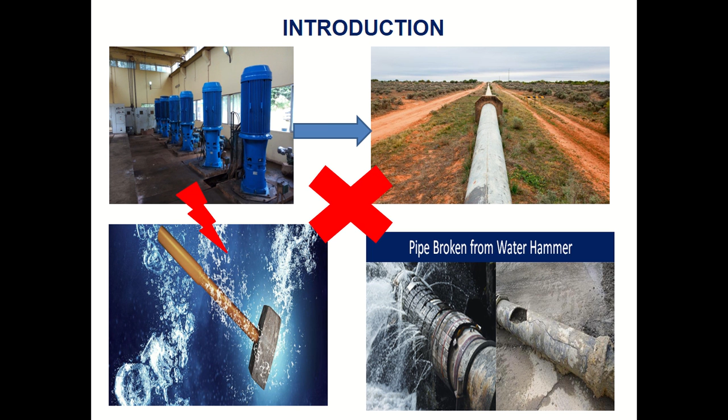CFD codes such as ANSYS Fluent and COMSOL Multiphysics present comprehensive modeling capabilities that can model different types of flow, ranging from simple geometries to complex geometries.

Background of the study. The case study, which is Ajalli water supply scheme, experiences power failure resulting in sudden shutdown of pump, introducing pressure transient that is linked to water hammer. For us to understand this water hammer very well, we also have to define water hammer in a different way, as a surge or pressure wave that is created due to sudden change in flow velocity in a confined system. The name water hammer originates from the hammering sound that sometimes accompanies this phenomenon.

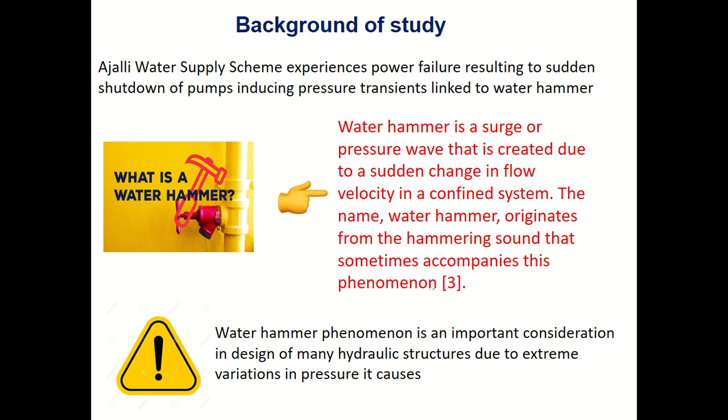It is important to note that this water hammer phenomenon is a very important consideration during design of many hydraulic structures due to extreme variations in pressure it causes. We also have to know that to analyze this water hammer phenomenon, a mathematical method is employed. This mathematical method analyzes water hammer by solving velocity and pressure equations for a well-defined elevation profile of the system, given certain initial and boundary conditions of the system.

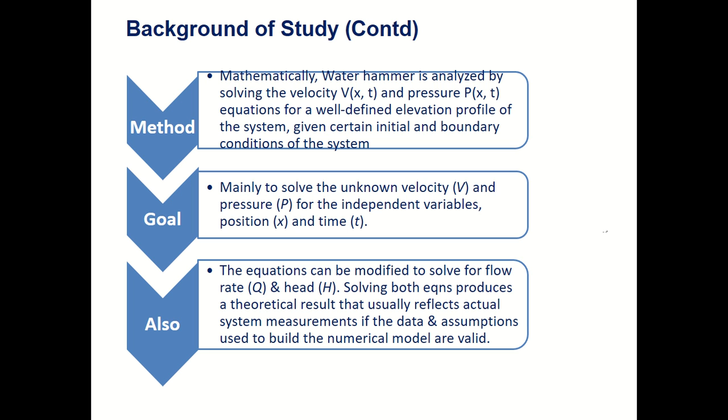The goal is to mainly solve the unknown velocity and pressure as independent variables of position and time. We also have to note that the equation can be modified to solve for flow rate, denoted by Q, and head, denoted by H.

Problem statement. The residents and industries within this supply scheme are largely dependent on this Ajalli water scheme, which is a very gigantic water scheme. We also have to know that this water hammer is extremely dangerous and leads to failure of pipeline integrity because of the excess pressure it induces.

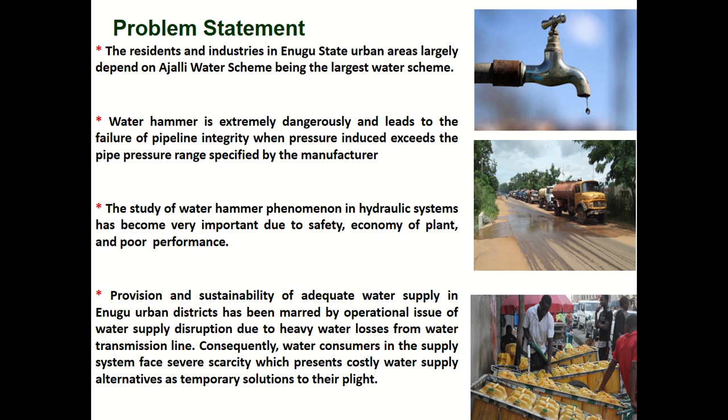The study of this water hammer phenomenon in hydraulic systems is very important due to safety, economy of plant, and poor performance concerns. Consequently, because of this problem of pipeline integrity caused by transient water hammer phenomenon, water consumers within this supply scheme are faced with severe scarcity, which presents them with costly water supply alternatives as temporary solutions to their plight.

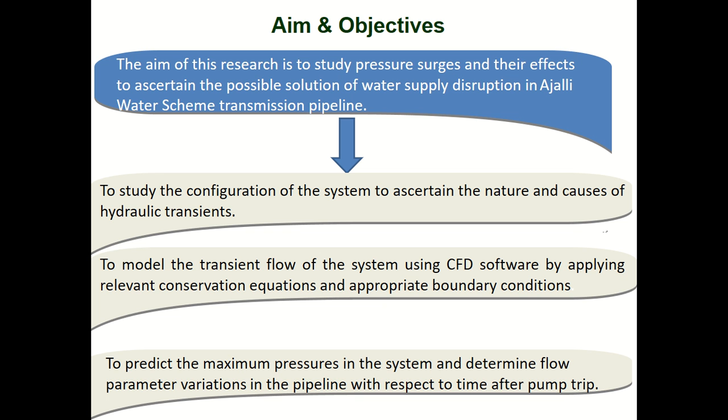Aim and objective. The aim of this research is to study these pressure surges and their effect to ascertain possible solutions to this pipeline integrity problem. In order to achieve this aim, the following objectives are carried out: to study the configuration of the system, to ascertain the nature and cause of this hydraulic transient, to model the transient flow of the system using CFD software, to predict maximum pressure in the system, and to determine flow parameter variation in the pipeline with respect to time after pump trip.

Significance and scope of this study. The significance of the study is to provide possible solutions to this pipeline integrity problem, also to provide insight into fluid flow and interaction with pipeline walls in order to better understand these transient events inducing high pressures, and also to provide a guide to analyze pressure surges using CFD software in systems conveying water through pipelines that are susceptible to pressure transient phenomena.

You also have to note here that this water scheme represents a large economic investment, so its smooth operations and safety must be guaranteed.

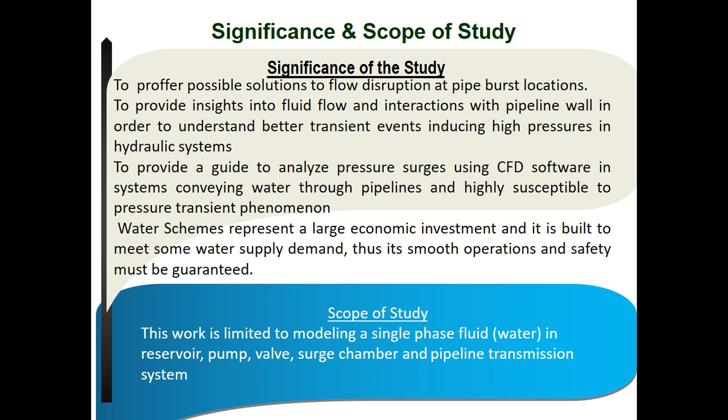The scope of this study, this work, is limited to CFD modeling of the system.

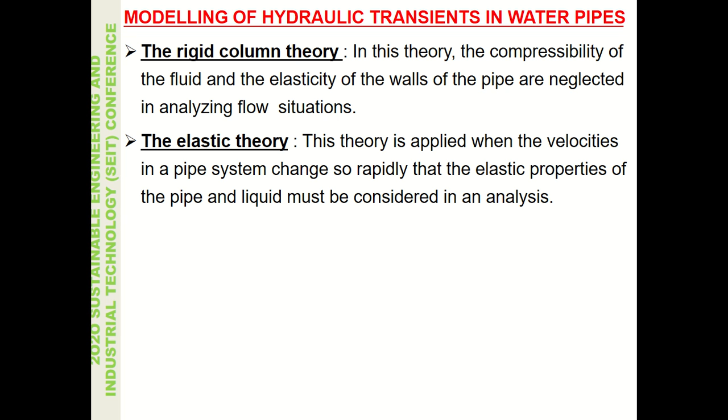For us to understand hydraulic transients in water pipes, two important theories are put forward where the basis of different mathematical models are developed. One is rigid column theory, which neglects the compressibility of fluid and elasticity of the pipe wall in analyzing the flow situation. The other is elastic theory, which considers the compressibility of the fluid and the elasticity of the pipe walls in analyzing the flow situation.

There are different hydraulic transient models obtainable: one is the one-dimensional hydraulic transient model, one is wall shear stress models, the third one is the two-dimensional hydraulic transient model, while the fourth one is turbulent models.

The turbulent model is also important to capture the turbulent nature of this transient water hammer phenomenon, because it tends to accommodate both the mean and fluctuating terms experienced during this transient water hammer phenomenon.

Methods of analysis of this hydraulic transient: we have the graphical method, the method of characteristics, the implicit method, the wave plan analysis method, and computational fluid dynamics modeling.

The most popular of these methods for one-dimensional water hammer analysis, excluding computational fluid dynamics modeling which tends to model the three-dimensional flow of the water hammer phenomenon, is the method of characteristics.

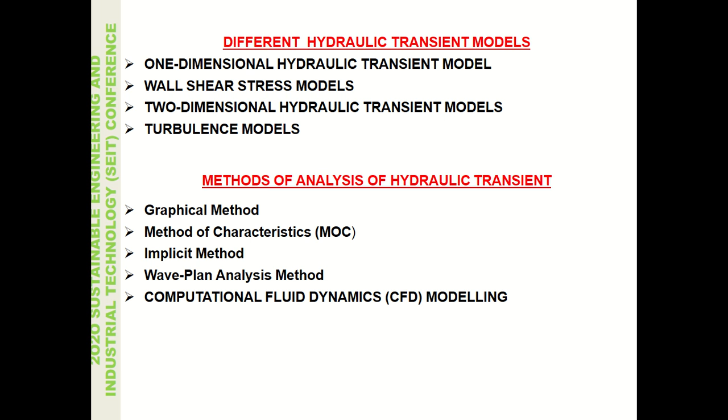It's usually one-dimensional and uses finite difference numerical methods to solve two partial differential equations developed from momentum and mass conservation equations in order to determine the flow rate and the head in the transmission pipeline system.

In order to model a system using computational fluid dynamics, three important steps are followed. One is defining the mathematical model, two is discretization of the problem domain, then the third one is CFD modeling of turbulence.

In CFD analysis of pipelines, there are five technical processes that must be followed. One is the preliminary study phase, two is geometrical modeling, where you design the geometry of the system.

Three is meshing, where you divide the geometry of the system into divisions and surfaces for the application of the applicable equations and solving afterward. Then solver setup for simulation, where you set up conditions that will enable you to analyze the flow problem.

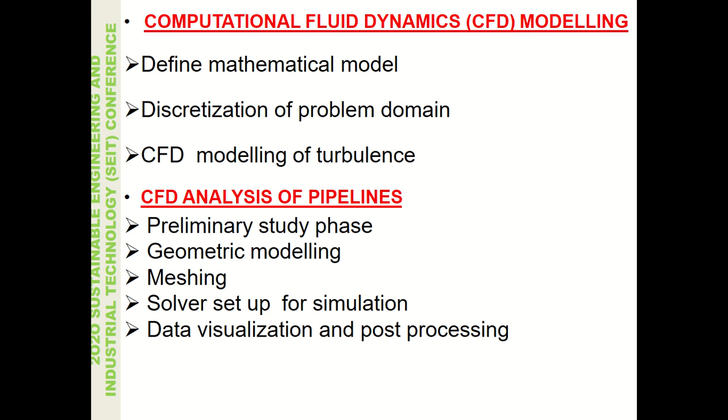Then data visualization and post-processing, which is just an interface for the user to see the result of the simulation.

Then justification for the study: the existing water hammer analysis is one-dimensional, using the method of characteristics to analyze it. So it's limited to one-dimensional classical methods of analysis, which cannot fully characterize the transient flow.

The one-dimensional method of characteristics analysis uses rectangular and diamond grids, which do not accommodate the pipe length and also the geometrical shape of the pipeline for purposes of analysis.

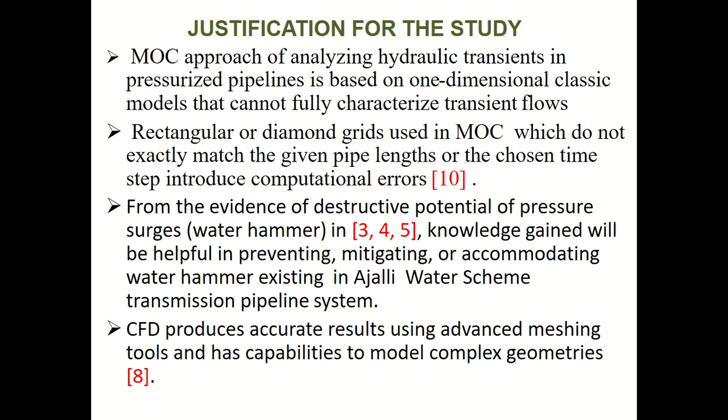We also have to know that CFD produces accurate results using advanced meshing tools and has the capability to model complex geometry. We also hope that the knowledge gained here will be helpful in preventing, mitigating, and accommodating water hammer existing in this case study, the Ajalli water scheme transmission pipeline system.

This is the 3D front view of the system for analysis with very important features like the surge chamber and bypass valve. We also have the transmission pipeline.

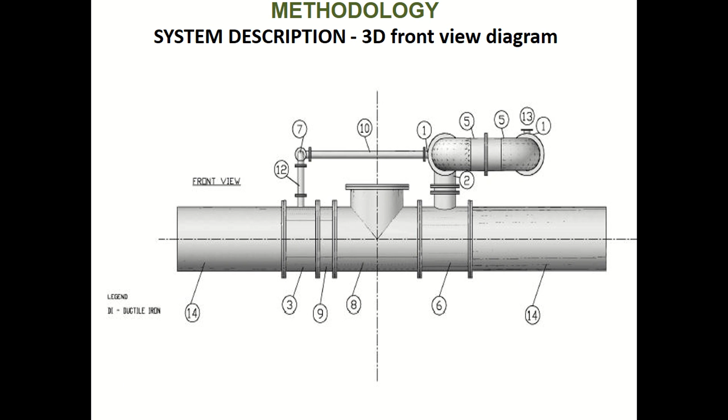We also have the conventional check valve. We also have the 3D model description of the system in all views with the table of materials indicating each component of the system. We also have the equation describing the water hammer phenomenon.

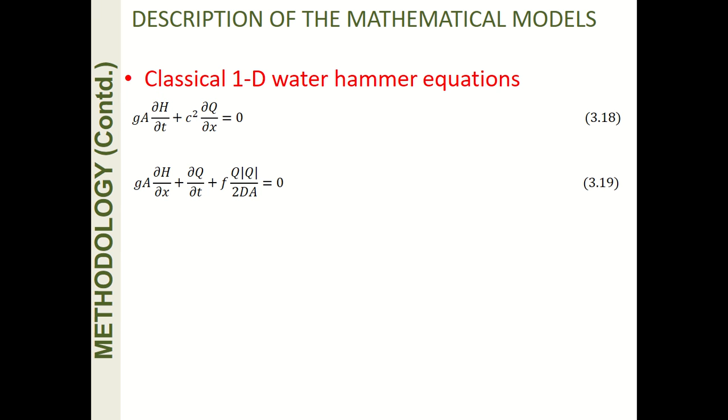One of the equations that describe the water hammer phenomenon is the classical water hammer transient equation, developed from the continuity and momentum equations, given by equations 3.18 and 3.19. These two equations are used to solve the unknowns such as the head, denoted by H, and the flow rate, denoted by Q. The second equation can also be used to solve for the friction factor and the diameter of the pipe.

In CFD modeling, we also have two important equations developed from the continuity and momentum equations. These two equations are the general form of the governing equations for CFD modeling.

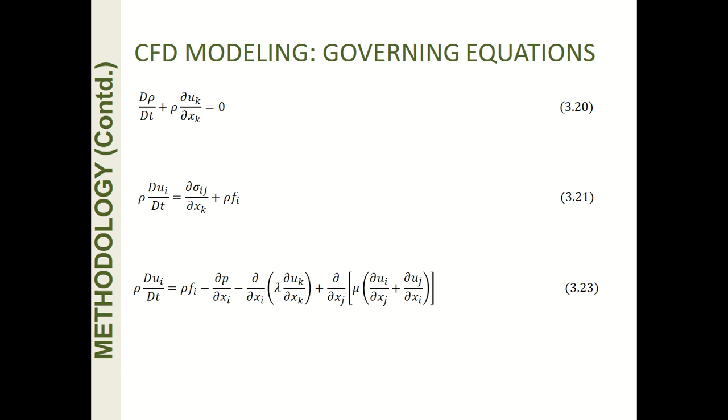The momentum equation denoted by 3.21 is modified into the popular Navier-Stokes equation by introducing the Cauchy stress tensor, which describes the state of stress inside a deformable body. We also have CFD modeling of turbulence, where the Navier-Stokes equation is modified into the time-averaged Navier-Stokes equation by introducing the Reynolds stress tensor that can be used to model the mean and fluctuating terms of turbulence.

In CFD modeling, we also have the important codes for the analysis, which are based on ANSYS Fluent R19.2 academic and COMSOL Multiphysics version 5.3 CFD code. These two codes present high comprehensive modeling capability that can model different flow types and different geometries.

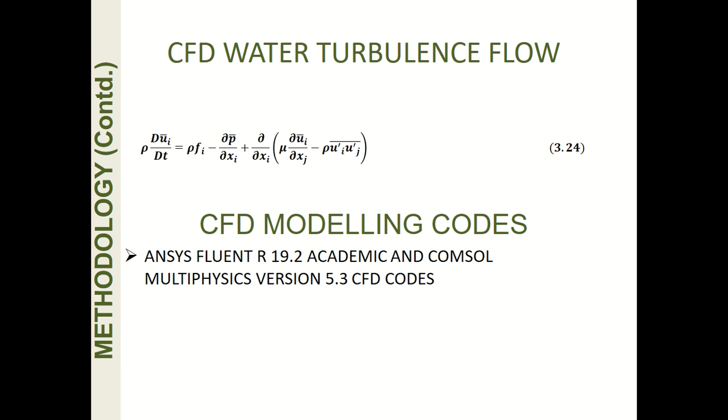CFD modeling input parameters and conditions are given as initial conditions. At time 0, the initial velocity is 0. We also have the inlet pressure at 22 bar, and velocity at 7 meters per second. We have the wall condition set to no-slip condition, assuming that the pipe walls are hydraulically smooth.

We also have the outlet pressure at 1 bar, which is atmospheric pressure. We also have the time step, recommended in the literature to give accurate results, at 0.01 second, and a time interval of 5 seconds.

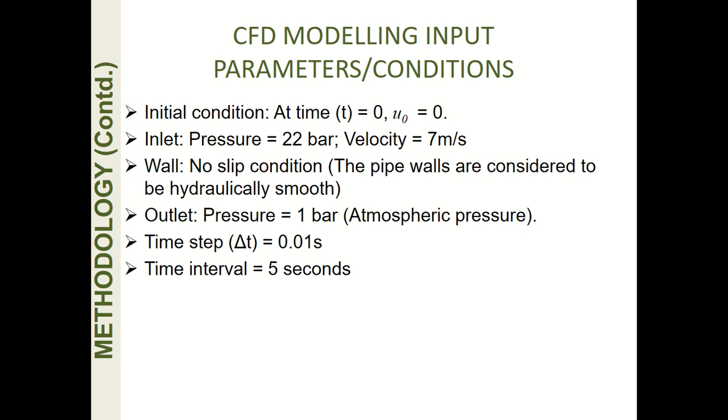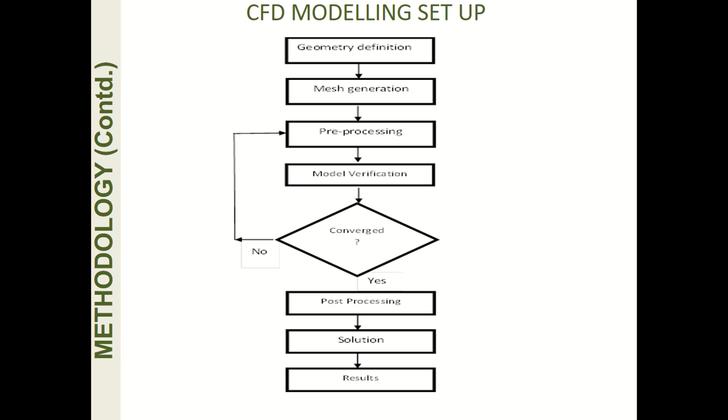This is the CFD modeling setup, where you define the geometry, generate the mesh, do pre-processing, and perform model verification. When you set up the simulation and verify the model, if it converges, you proceed to post-processing the solution and the results. When it doesn't converge, you go back to pre-processing, where you adjust your conditions to achieve a new computation that leads to convergence of the solution.

This is the results and discussions. On unsteady pressure variation with time, we see that the maximum pressure experienced after a 5-second interval is 22.41 bar, and the location of this high pressure impact is on the pipe wall, shown by the contour lines in red. You also see that the point of attachment of the surge chamber also experiences this highest peak pressure of 22.41 bar.

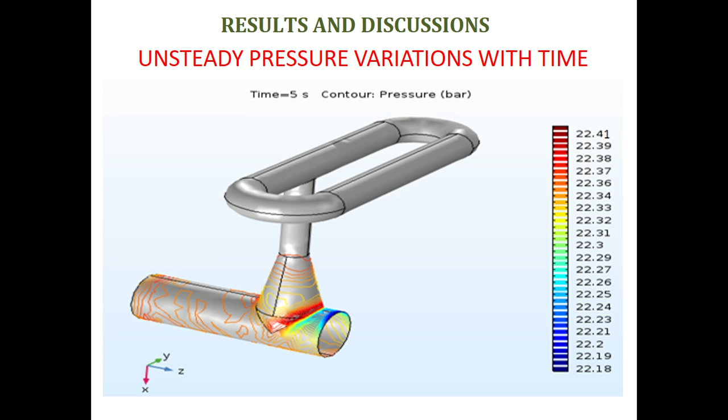After 10 to 30 seconds, the contour lines start attenuating, showing that the system is gradually reducing in intensity until it attains a steady state condition at the 30-second interval.

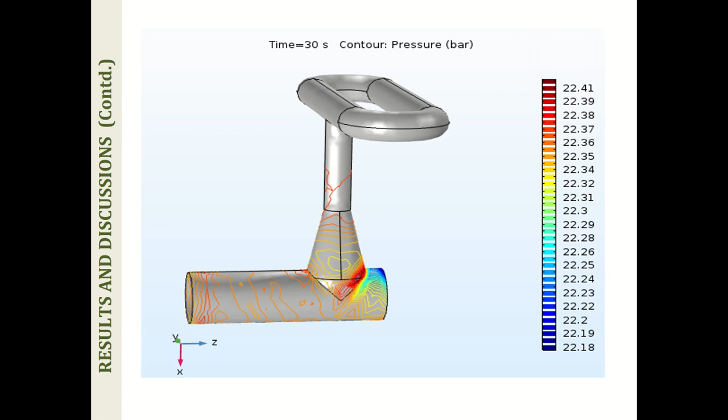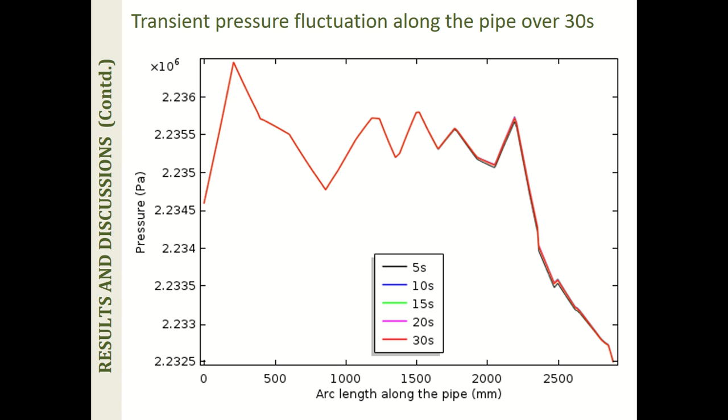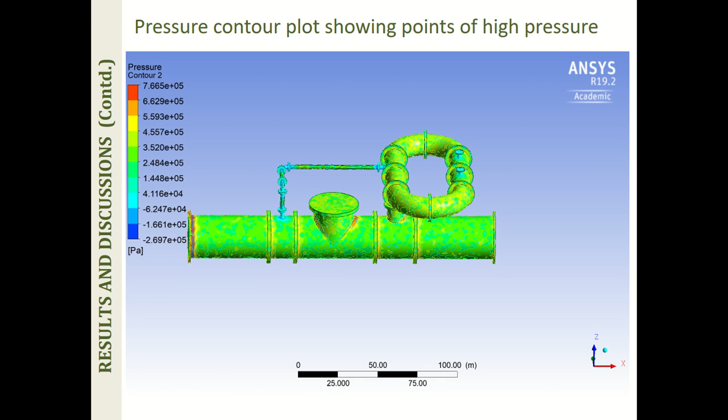We also look at the pressure contour plot showing the point of high pressure, where the point of attachment of the surge chamber joints, like the connection of a conventional check valve and some other joints, experience the highest pressure load on the system.

We conclude from here that, given the results of the analysis, the hydraulic transient induces high pressure in the system, and the maximum pressure experienced is 22.41 bar, which falls below the pipe design pressure of 41.5 bar. This is owing to the presence of the surge chamber within the system, which could mean that the places of high pressure effect could be a result of obstruction in the system.

Also note that the 3D transient model shows that the pump trip due to power failure generates a pressure surge that travels downstream the pipeline and up to the surge chamber, resulting in water hammer on the pipe wall.

Also notice that because of this obstruction, the pressure load at the point of attachment and joint location is accompanied by vortex shedding, which enhances the transient flow around those joints within the system as the fluid flow experiences opposition during the hydraulic transient.

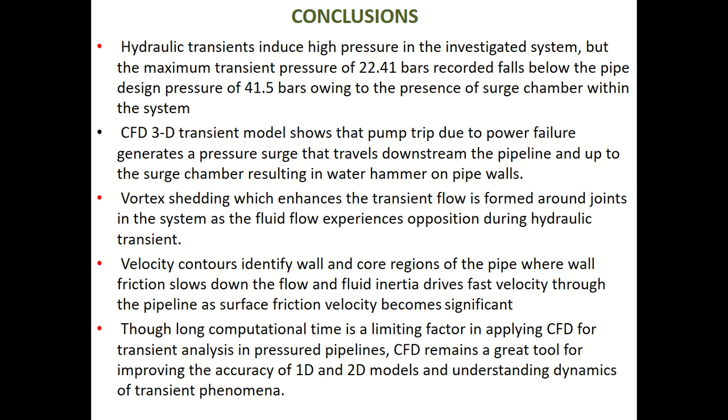We also have to know that though long computation time is a limiting factor in applying CFD for transient analysis in pressurized pipelines, CFD remains a great tool for improving the accuracy of 1D and 2D models and understanding the dynamics of transient phenomena. These are the references.